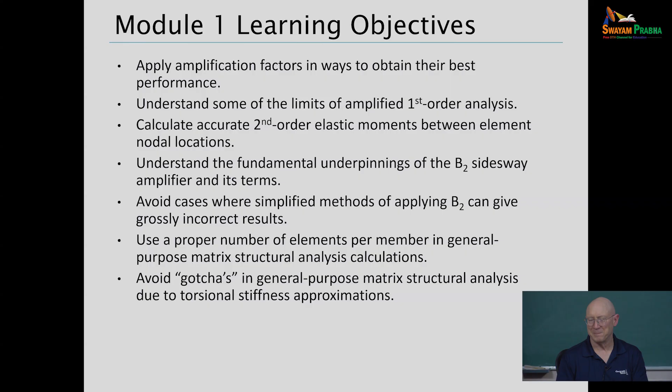All right, so there's topics, and you'll see the topic numbers scattered through some of the different lectures, so you'll know that we're coming back to here for certain things. We're going to focus on topic 1.1 here for the first session. We'll take a break and talk a bit about 1.2.

And then I want us to spend some time. Hopefully, I can have you in a good place where you can see how powerful the Consteel software is today. We'll just do some very basic things with it, and we'll continue to work with it further as we move through the course.

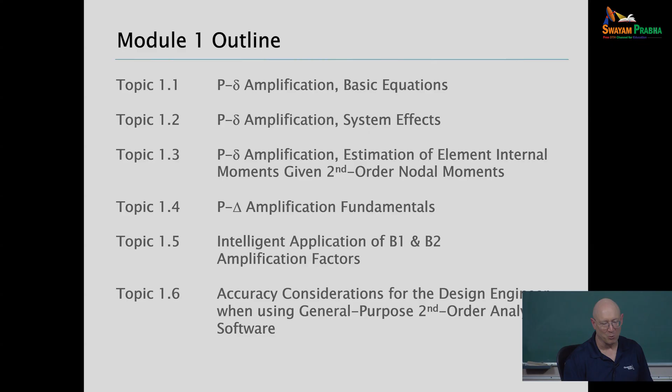In terms of source materials, a lot of the materials here are from the AISC Steel Construction Manual 16th edition, which is the 2022 edition. That's the gold book there. But also, I was fortunate to be involved with some other really smart engineers in several design guides, Design Guide 25 there in the middle, and Design Guide 28, AISC and AISC MBMA guides that AISC provides in U.S. practice. And of course, I've been looking a lot at the Indian standard to try to tie in with that where it may be useful.

All right, so topic 1.1. Let's start with the most basic problem in terms of second order effects. We've got a member subjected to axial compression and equal and opposite bending moments, so it's in uniform primary bending. But of course we have a deflection of the member in bending, and because of the axial compression, the bending is increased. That's what we call our P small delta effects.

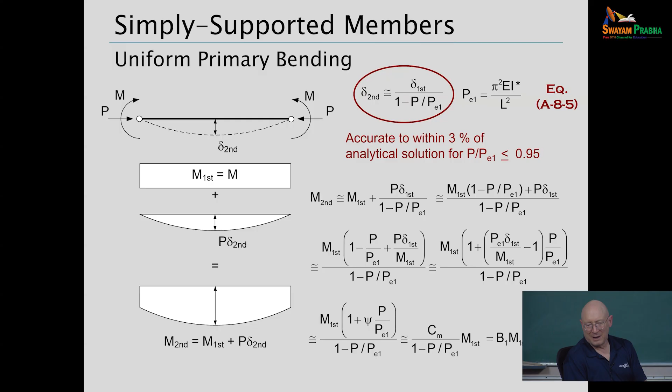If we have a first order analysis, we amplify the moments by B1 to get our estimate of the second order moments. Now, everywhere you see a red equation out to the right, that's referencing the AISC standard, in this case Appendix 8. That's where that equation is coming from. And in the general information tab provided on the Google Drive, the PDF of the AISC specification and commentary are there for your ease of access.

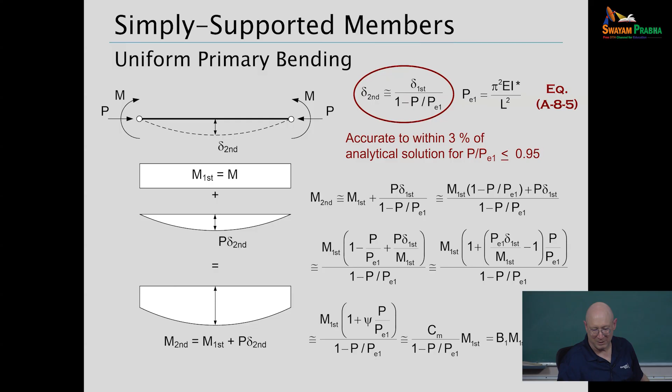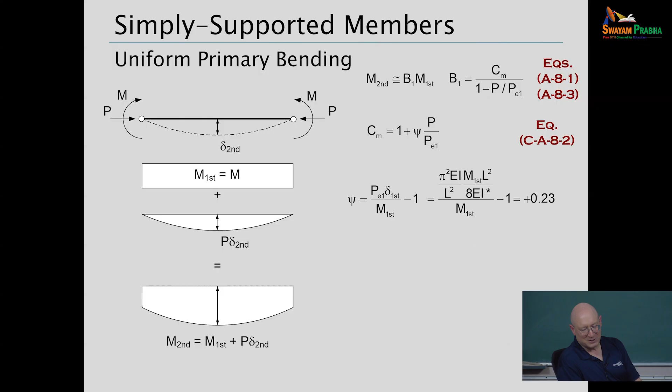All right, so we just did some fairly simple algebraic work to write the B1 amplifier. Let's drill into C sub M a little further. That C sub M is 1 plus psi times P over PE1. For this member subjected to uniform bending, we can calculate delta first without much trouble. That's ML squared over 8EI. PE1 is again pi squared EI over L squared. So let's put all the terms in there. We can see that the psi term for this case reduces to positive 0.23.

Well, this is a little bit weird. The AISC specification, for a uniform bending case, suggests that you just take psi equal to 0. And every other standard in the world that I'm familiar with does it that way for uniform bending. So you could argue that looks like we might have an approximation here. Now, from theory of elastic stability, the rigorous solution by Euler-Bernoulli beam theory is shown there: the secant of pi over 2 times the square root of P over PE1, times M first.

If we compare to that, we can see that we've got basically a 15% error with this case that I'm showing you here. So that's a bit large. Of course, this is where we can wave our hands a bit and wave it off. In design practice, have any of you ever designed a member in uniform bending? Would the end conditions be pinned?

So also, doesn't this C sub m depend on the slenderness ratio of the beam? It does. Where does it come into the picture? That's coming in through the P over PE1. So the PE1 has the EI in it and the L. Okay. And psi doesn't depend on that. Psi seems to be independent. Correct. Yeah, we can see from our basic derivation we did, psi basically ends up being the form that I showed you here, there in the middle of the screen. Okay?

All right, well, let's move to something maybe a little more interesting than just a uniform bending case. What if we have a simply supported member and it's subjected to transverse load? So these are two basic cases that show up in the commentary to the AISC specification. Uniformly distributed load with axial compression, a concentrated load at midspan with axial compression.

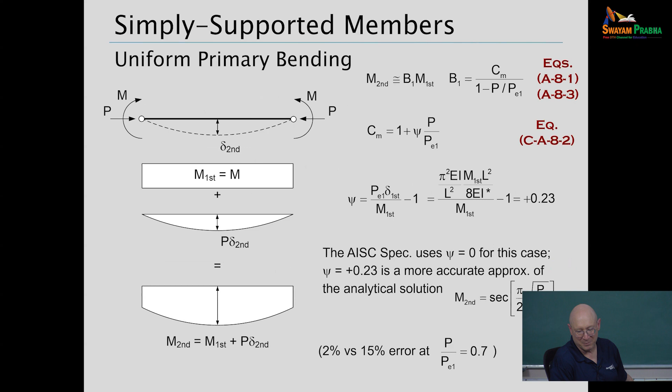So if we use that same development, very simple algebraic development, right? All we did is just said, okay, we need equilibrium in the deformed geometry. So it's M first plus P delta, and then we put in some approximations for the amplification of the displacement. That got us to the psi formula, and if we put in the calculations for the deflections here, basically we go back to this middle equation here where we got positive 0.23 for the uniform bending case.

For the uniformly distributed load case, you actually do get psi equals 0 to maybe about three or four significant digits when you substitute into that. For the concentrated loading case, you get psi equals minus 0.2. This is what usually happens with most situations with the use of this formula for C sub m. You get a psi value that's negative, which means that your moment amplification then is not as severe as your displacement amplification.

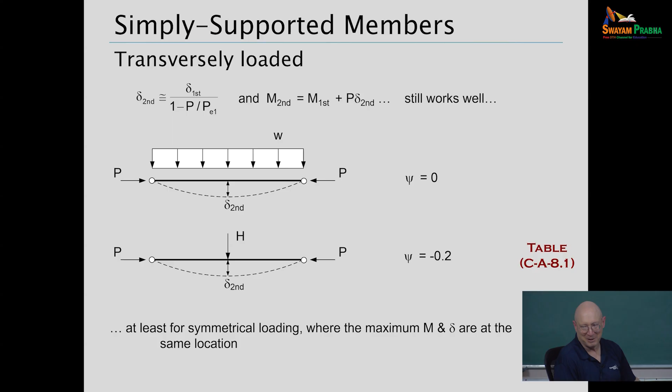So other cases, we can use this same form, but here we essentially have to revert to the rigorous calculation from theory of elastic stability, and then we essentially can say, well, what psi value do we need in order to fit the results of the theory of elastic stability solution? And so there's a paper that's in the general materials that I've given you. Actually, I think this is in the Module 1 section. That's from Iwankiw that basically shows the development for these particular cases.

So if you got a fixed beam, well, guess what? Your non-sway effective length factor for a perfect fixity at the ends is 0.5. And you get a psi of minus 0.4 for the uniform distributed loading. And in the other cases that I'm showing you here as well, the K1 and psi values, of course, for a propped cantilever, the effective length factor for the braced buckling with propped cantilever is 0.7.

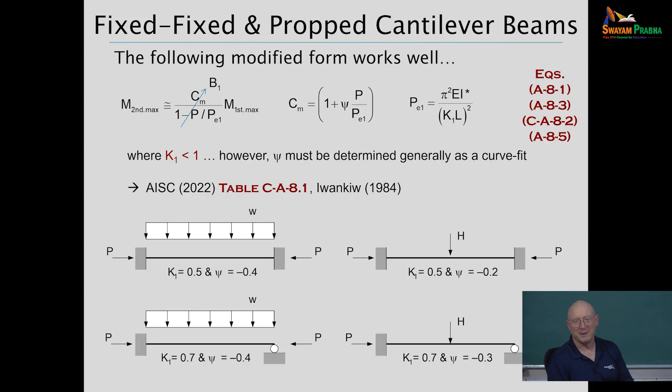The Eurocode is based more on an Ayrton-Perry approximation. We'll talk about what that is and how that works. So I'll compare and contrast a bit, but I didn't want to come here and lecture to you, oh, here's how we do something in America, and that's nothing like what you do here in terms of the stiffness reduction. So a few things about that, why we think it's a good way to go in the Americas, but then I'll leave it there. And so the EI star, that's where sometimes, at least in the Americas, we'll implement a reduction on the bending rigidity as part of our elastic analysis calculations.

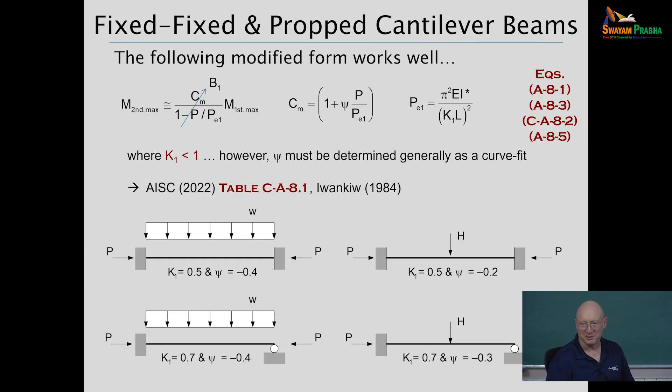All right, well those are great, but those are all just really ideal boundary conditions, all of those cases. So what do you do when you've got something practical where it's not ideally fixed, it's not ideally pinned at the ends, it's connected to other stuff? You've got general transverse loads. The supports could be flexible. They're not necessarily rigid supports.

In that case, if you try to derive or curve fit a psi value, you'll be very unsuccessful, because you'll find that the psi value just moves around all over the place, trying to curve fit something that general. So what do we do practically speaking? Well, in many situations in civil engineering, bridges, buildings, we often don't have members that have huge P small delta effects. So we can get away with some very coarse approximations. And what's the coarse approximation? I'll just take C sub m equals 1.

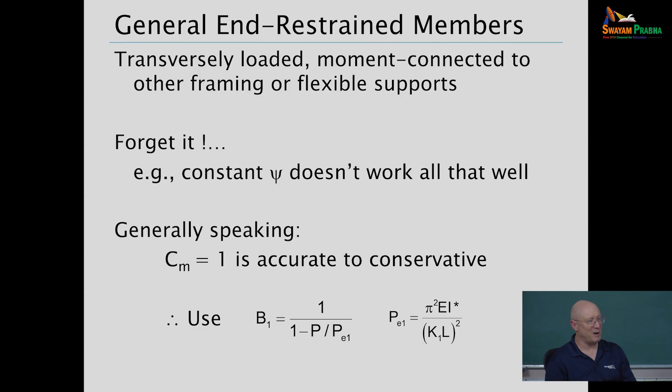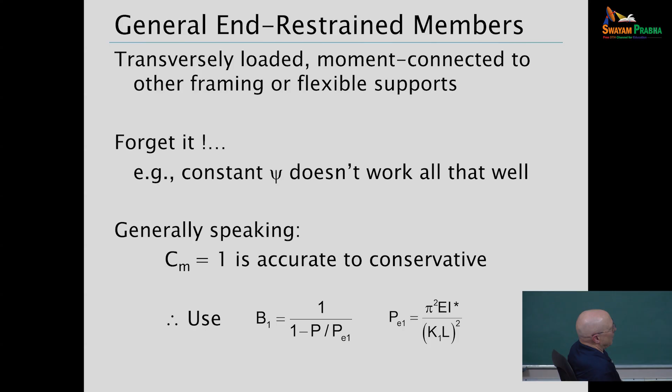And so we basically apply an amplifier, B1, 1 over 1 minus P over PE1, the most basic amplifier in the world. Except PE1 here is given whatever connectivity your member or element is connected to. If it's a non-sway case and you could calculate an effective length factor for those boundary conditions, that gives you a little better result than if you just use the Euler load for PE1. So that's essentially the same factor you're using for the displacement? The same as for the displacement, that's correct.

Let's look at a case that shows up a lot. I'm showing this member turned horizontal, but if we ignore that I'm talking about pinned-end conditions right now, in multi-story buildings we very typically have moment loadings that look like this: reverse curvature bending on the member. Well, in AISC practice, given these first-order moments, where M2 is the larger first-order moment, shown at the right-hand end, and M1 is the smaller moment, we still have P small delta effects. For design, we need the maximum second-order moment, which we call MU in our design equations. We're going to use the same form, except this case gets a different C sub m factor.

Now, one of the nice aspects that practically often happens with members like this: generally we'd say we need to calculate an amplification factor to evaluate whether we're getting any larger moments between the ends. But in practical cases, that amplifier often gives you a number less than 1, in which case M2 is your largest moment. The moment along the length never gets larger than M2. If you get a number less than 1, always take B1 as 1, or if you get something larger than 1, then the moment between the ends is estimated to be larger.

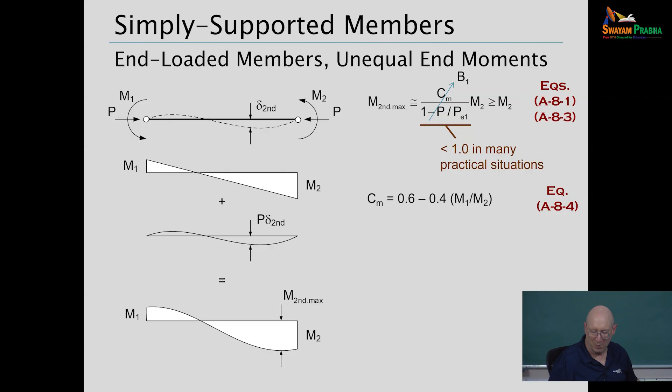And the C sub m in this case also shows up in some of the Indian code equations, in a more general context. In U.S. practice, we use this as a reasonably good approximation for this loading with ideal pinned end conditions. It's a little conservative for combined large M1 and M2, so reverse curvature bending, and large PE1, but a fairly adequate approximation. In the limit approaching uniform bending, we can be underestimating by as much as 15% at P over PE1 of 0.7, which is why I picked 0.7. It's hard in practical design to get P over PE1 larger than 0.7. So we have that unconservative error in that case, which we've waved off, but otherwise it's a reasonable approximation.

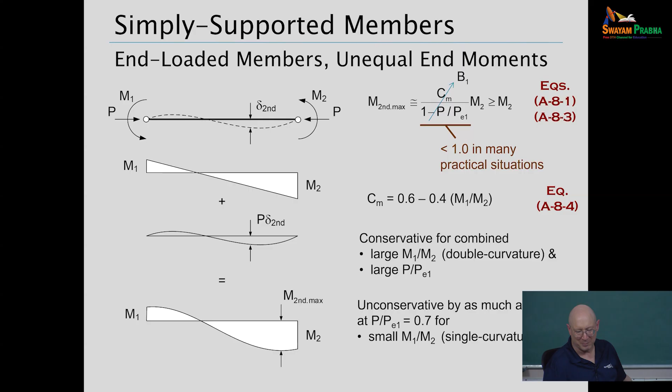And then general end-restrained members, subjected to end moments, but without any transverse loads between the ends, moment connected to other framing. What do we do? The generalization is similar to what I showed you earlier. Same form for B1, same Cm equation for this case, for a linear first-order moment diagram along the length. But PE1 changes again. Given the end conditions, we can calculate an effective length factor. We'll look at some tools for doing that later today, either computational or hand tools that we like in the Americas. So that's the general approach.

Now, lots of simple approximations to try to do practical design. But I want to show you next where there's really much more to the secondary interactions between adjacent members than these equations imply.